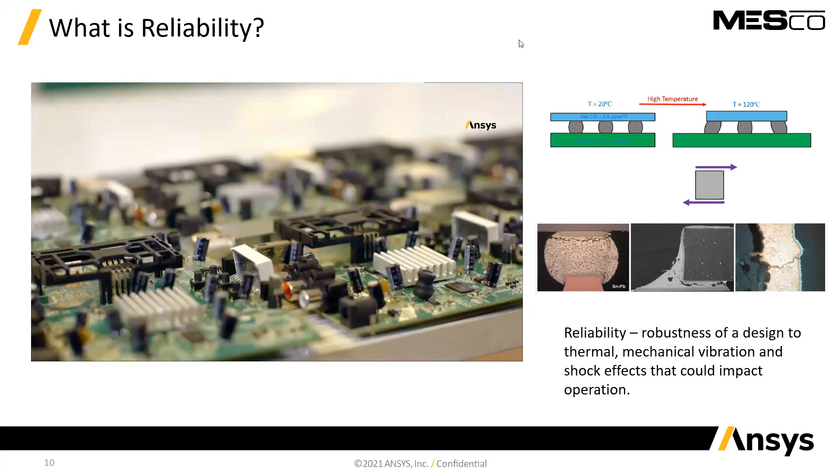Let me share my screen and get started with our two-hour introductory session about Sherlock. I want to run you through an entire project by loading the ECAD data, doing all the necessary definitions inside of Sherlock, running the analysis, checking the results, and then I guess at the end we'll have time to do some optimization loop here.

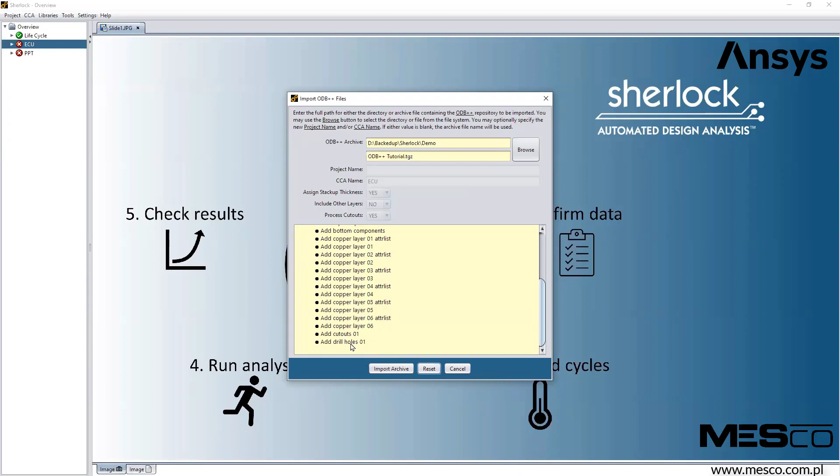Now we get a quick summary of what Sherlock is doing. As soon as I click Import Archive, we add board properties, a stack up, package, board outline, a couple layers, and then drill holes, cutouts, and everything. So let's click on Import Archive - that takes a couple of seconds.

You can see now on the left side, under our circuit card, we get automatically all the files from the ODB files added. There are some inputs automatically created: the parts list, stack up, layers, pick and place, drill holes, net list, and the DFMEA, which indicates that there's something wrong with it.

In Sherlock, you can see if things are fine, you get a green tick. If something's wrong, you get a red cross. But that's not an error message, it's more like a warning message - it just tells us that we don't have the right information for DFMEA, a failure mode analysis.

If we are not interested in any DFMEA analysis here, we can just ignore it. That does not mean something is wrong and all the results are wrong, it just means I didn't do the initial definition. So I need to go in and view my DFMEA data to fix this issue.

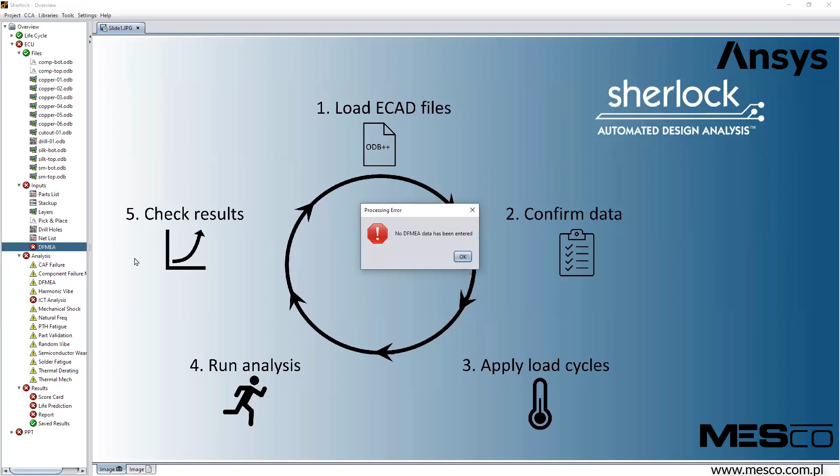So don't be worried when something is not marked with a green tick. Sometimes you get question marks - that also means there's a warning. You can check the warning and see if that will affect the results. Here it's just that no data has been entered. I can't run the DFMEA, but the rest is still fine.

Next thing I want to check when I load the ECAD files is I double click here on the layers. When I do this, I get the Sherlock layer viewer. That's a good way to check what kind of information came in - does it seem right? For example, here the blue line is the outline of the board. Does it look right? Is it the same outline?

Sometimes, if it's not such a rectangular board but a board with some round shapes, maybe there are less points in the ODB file and the outline does not look right. On the left hand side here you have the layers, and you can decide what kind of information should be displayed. So on the other layers we have the outline, and if I toggle it and untoggle it, you can see that the blue line is my outline. With the components, we can hide the components on the bottom here - now that's just a top view of the board.

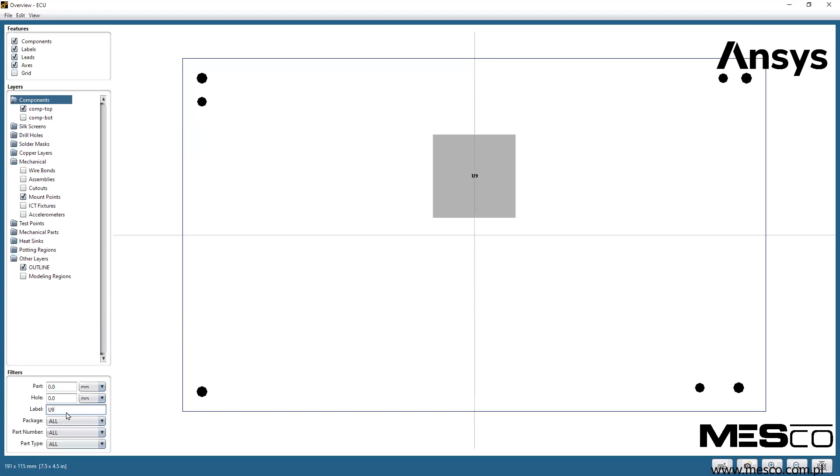On the bottom here we have some filters, and with the filters you can filter for parts by size, holes by size, by labels. If you're interested where's my component U9, just type it in, click enter, and now you see just component U9. If you write in U10, no, it doesn't work here, it just works in the other filter. What's important to remember: sometimes you don't see all the components and you don't know why. Just delete the label here and click enter again to get all the components back.

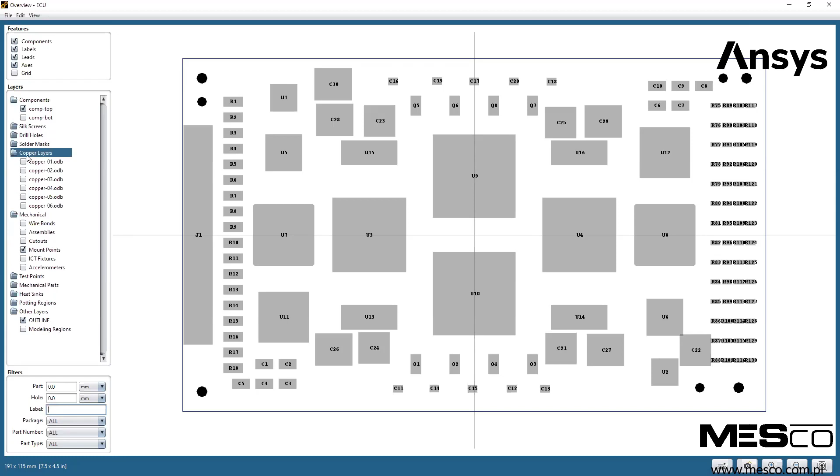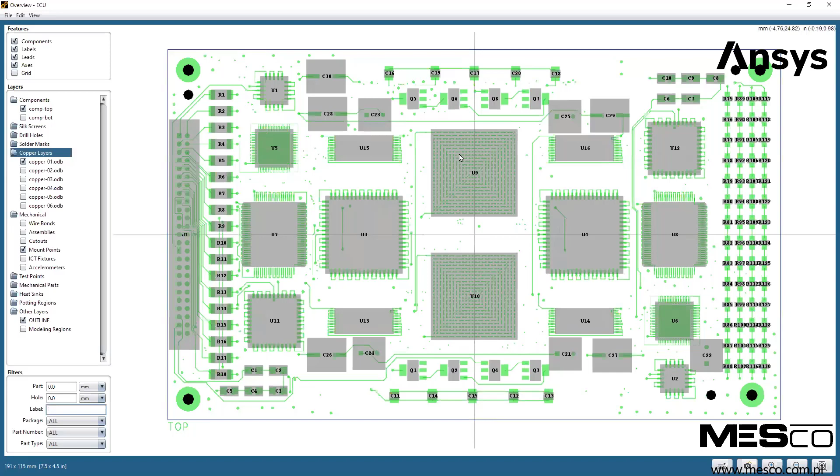I won't go through all the layers here, but the copper layer is an important one. You can bring in the first copper layer. Now we can see all of the components, and the green stuff is the copper. We can check if the copper here fits onto the pads, if the pads fit to the components here, and that's the first check. We come back to this a bit later. So the layer viewer is very important to check if everything seems right, which came in from the ODB++ file.

Next step, I usually open the stack up, and for the stack up we can see all the different layers of the board. Here in this case it's 11 layers. We have the thicknesses for each layer, and for the signal and power layers, Sherlock gets the copper amount for each layer. Here the first layer is 17.6%. That's what you have seen in the picture I showed you, all the green stuff, that makes 17.6% of the entire board.

And with this information we can predict material properties, like CTE, Young's modulus, and we get the same material properties for the entire board. You can see the combined values here at the top. Since there is no information on the laminate layers and the laminate material in the ODB file, Sherlock always assigns a generic FR4 material and predicts the material properties here. You have to manually check if you are using a different material and a different construction.

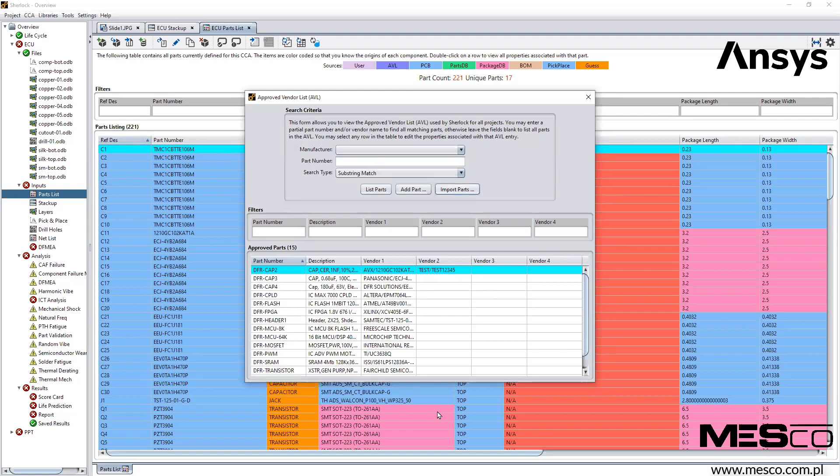And of course, you don't want to do this manually for all of the components. So the way to go here is simply export a CSV file from your PDM system, which has all the internal part numbers, description field, and then vendor name and vendor part number as separate columns. Go to import parts, select your CSV file, and import this information. That is very, very easy to import all the approved vendor list information.

Once this is done, you can select all of the components again here. Control A works here in the parts list to select all the components. And then you can update this parts list with the information from your AVL. This will give us the link between the internal part number and the external part numbers. Once we say update parts list, we're able to select all of the parts from the Sherlock part library.

One important thing here is the matching part number and manufacturer, or part number only. In this case, we didn't import any manufacturers with the ODB file, so we can't match part number and manufacturer. So normally we just select part number only, and then Sherlock will take the first component which is defined in the AVL list and matches this vendor here.

As I mentioned before, shouldn't be a problem for us, because we are assuming that for one internal part number, we get exactly the same part. It doesn't matter which vendor we order it from. If that's not the case, the part should have a different internal part number to identify it.

You can scroll through the list. Everything is green, meaning the information is from the parts database, and so we know we can trust this information. There is validated information from the data sheets in here now. And that is what we want to achieve.

In some cases, not all of the parts are found. That's not a problem. Whenever there's one part missing, you can go to edit parts by right-clicking on the component and manually add the information from the data sheet, check if everything is right, and then save the component.

So here in this case, you can see that's this capacitor. By right-clicking on the three dots on the right-hand side, we can see that the guessed value was now updated by the information from the parts database, and now it's green. So it is still a capacitor, so the guess was quite good. In this case, on the package, we have the package length, width, thickness, which is important. We have the material assigned here.

If I go to location, the location still comes from the ODB file here, which makes sense. The X and Y coordinate and the rotation and everything. That's information which is project specific, so I don't want to store this information in the library, but I still want to use the ODB information. We have the lead information. In this case, it's a C lead with a lead count of 2.

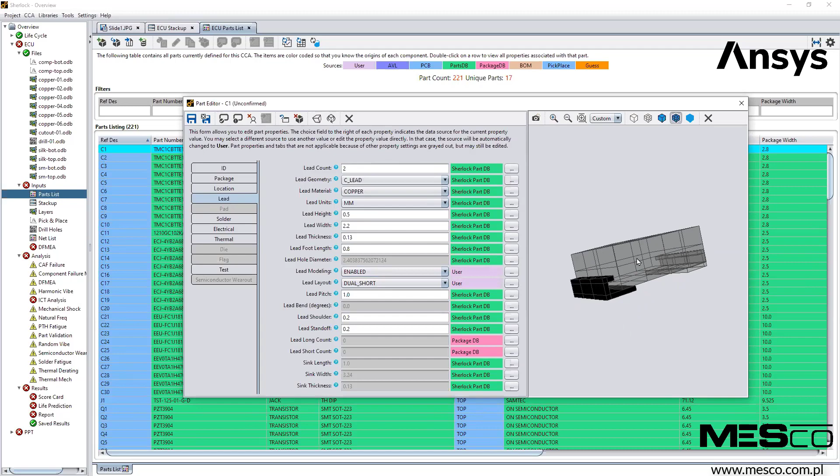Now, when I activate the lead modeling here and click on this cube at the top, I can bring in a 3D preview and check if everything makes sense, if the component looks like it should. And that's basically the level of detail I can get in here, and check if I want to model this part with this level of detail. That's how my FEA model looks.

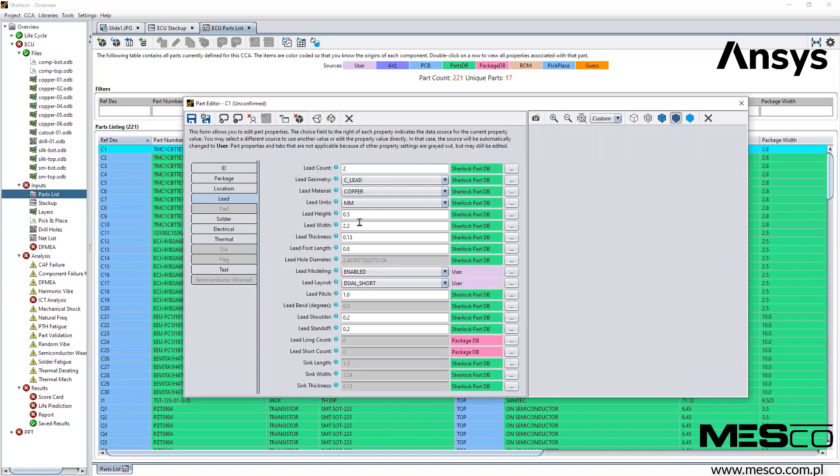You can apply changes here. As soon as you change something like lead modeling enable, you can see that this value is now changed to a user-defined input and not any longer from the Sherlock parts database. If you have done some changes, for example, for the lead geometry here, you can save what you have changed.

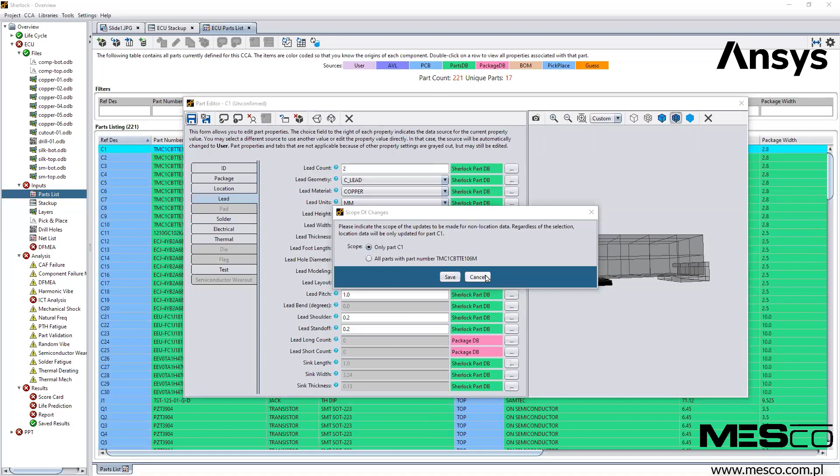When you do this, there is a message which pops up asking if you only want to change it for part C1, or if you want to change it for all the parts with the same part number. So you can see that here the part number is the same for the first 10 capacitors. So we can apply these changes for all the components. I cancel it here. Another thing we can do, we can confirm parts properties. As soon as I apply any changes, the part is unconfirmed. And unconfirmed parts can't be stored to local libraries.

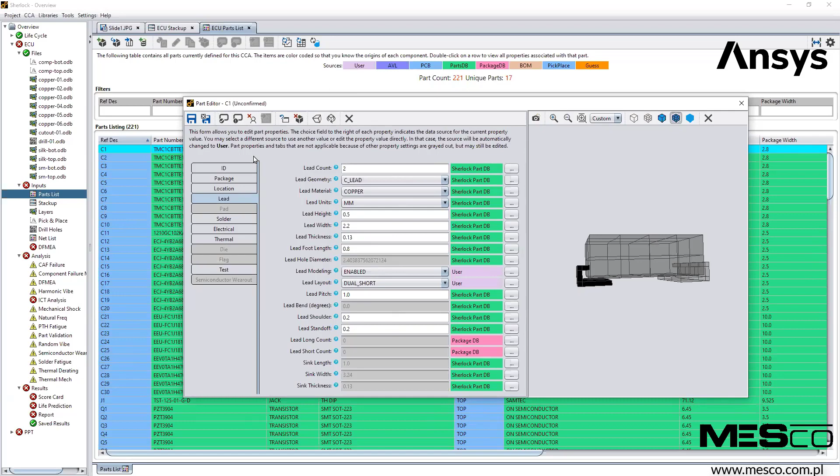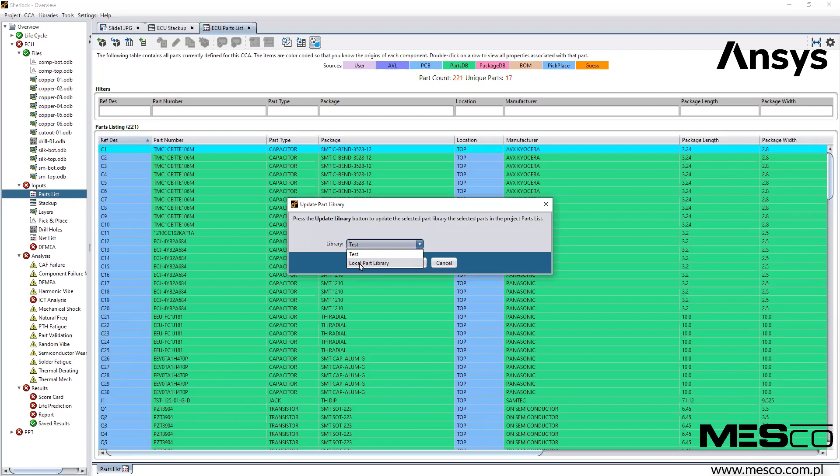So if we are sure now we have all the right settings in here, we can click on confirm all part properties, and in the next step, use the library update. To bring this updated information into one of our local libraries, click on this button here, select the library you want to update. The Sherlock part library is read-only. You can't bring in any new parts, but for the local part library, it's possible. Just update the library with the information from this part, and then you are able to use it with your next project. So that's, I think, a very important step to maintain your local library, bring in all the parts which are not in the Sherlock part library in the first place, and have them available for your next analysis.

Here, from my personal experience, it takes a few projects to get the components which are commonly used on your boards into your local library. So maybe when you first import the ODB file, check with the library, you can match maybe 80% of the components. So like 20 to 30 components might be missing. And then you create them manually, bring them to the local library. With the next project, maybe then just 10 components are missing, and that becomes better.

And at a certain point, just completely new components which have never been used before in your company are missing, and so you can then match them, bring them into the local library, and it's not too much work once you have set up everything here in Sherlock with the first few projects.

Okay, one last thing I want to show you now is once we updated the parts list, we need to check our layers again. So double click on layers here, bring in the layer viewer again. We might have changed some of the settings here. For example, U5 got a new shape here, and for some reason these components don't fit on the copper mask, and most likely that's a mismatch in the definition for the part.

So the part has a length and a width, and we define it in our electronic design tool, and we define it in Sherlock. And in Sherlock, the common definition is that the length is the longer side, and the width is the shorter side. And the rotation angle is defined by the length to the x-axis of the board.

If it happened that in the ECAD tool the length is the shorter side, the component is rotated by 90 degrees, like here. And that's something we want to check once we have all of our components in. We check here at the top layer if everything fits on the copper. So components at the top, first copper layer, identify two components are wrong.

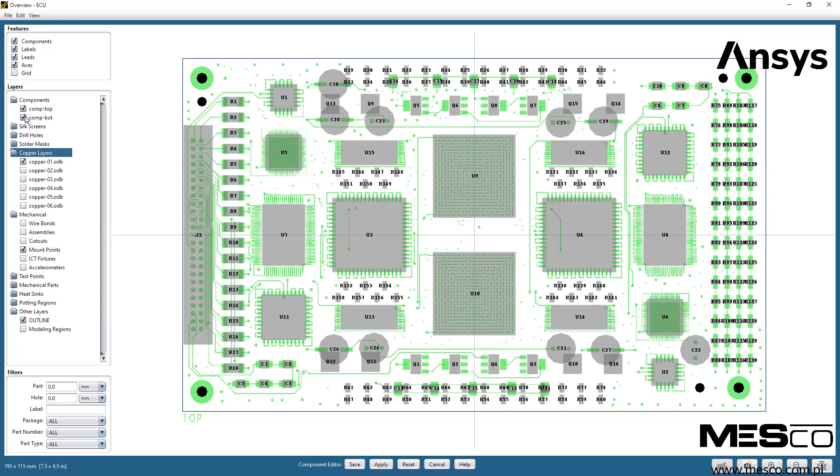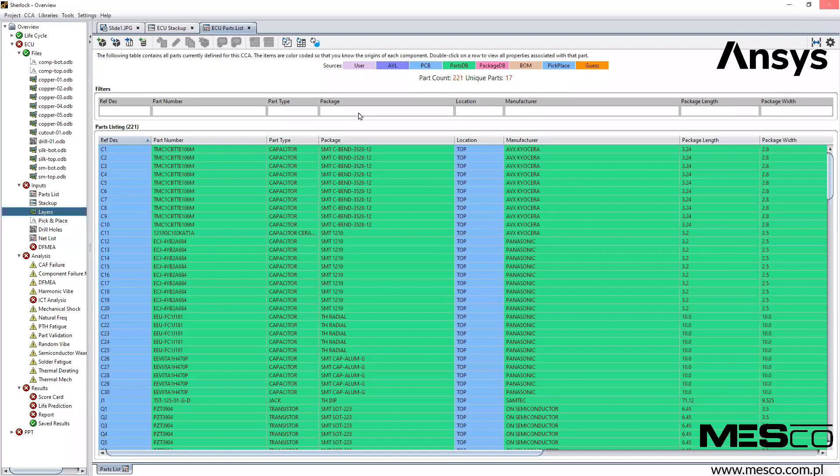Then we can do the same for the bottom side, components on the bottom, last copper layer, check if everything fits, and at the end, save your changes. And now we are fine. So second step, confirming data, is done. We have all the information in, we have the geometries, so we don't have to worry about this.

At this point, I want to show you more information. So as I mentioned, in the help you can find, for example, under managing parts, how does the part library work? How does the approved vendor list work? And part list management, filtering components is very powerful. That's all information which is available for you in the help section.

But if you want to learn more about Sherlock, I would recommend logging into the ANSYS Learning Hub, because there are tons of information about the different disciplines, the different products we have at ANSYS, different workflows, and there's a very, very interesting section about electronics reliability as well. Here, if you go to the structures section, under structures, that's basically all the Workbench, Mechanical, optimization information. And there's a special section about electronics reliability.

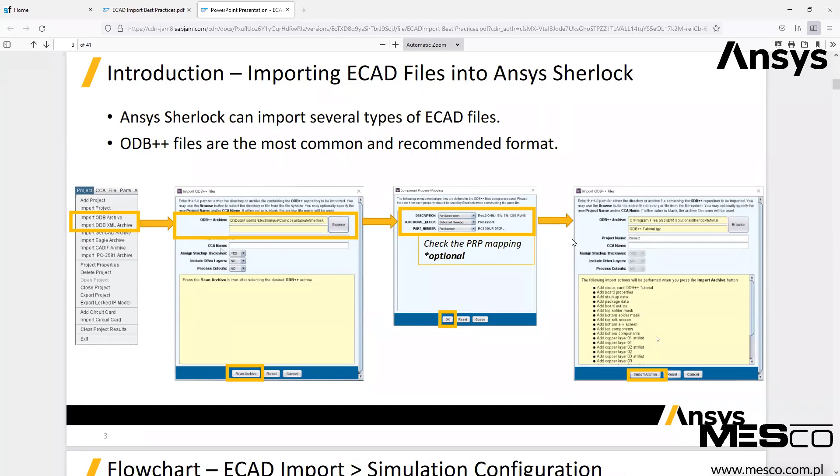Most likely you start with the Sherlock basic training. If I click on this, there are different sections here. Basically all I'm showing you today. And what I would also recommend is here in the quick start page, there's an ECAD import best practices. Let me open this in a PDF viewer. Basically, the entire import process of the ECAD file, everything I showed you today so far, is in this document, which makes it very easy to handle.

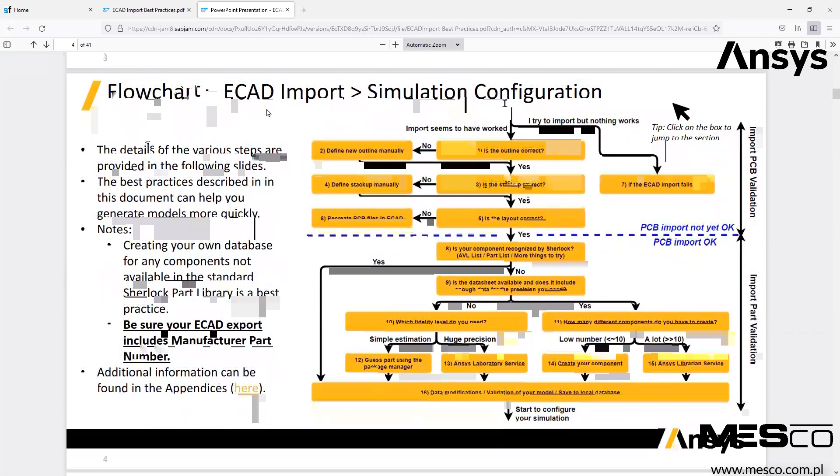There's this flow chart: once you imported your ECAD file, it worked, everything came in right. The first question, is the outline correct? What does this mean? Just click on this yellow field, and now you get more information about how to check the outline, what you have to press. Here's a measurement tool. You can

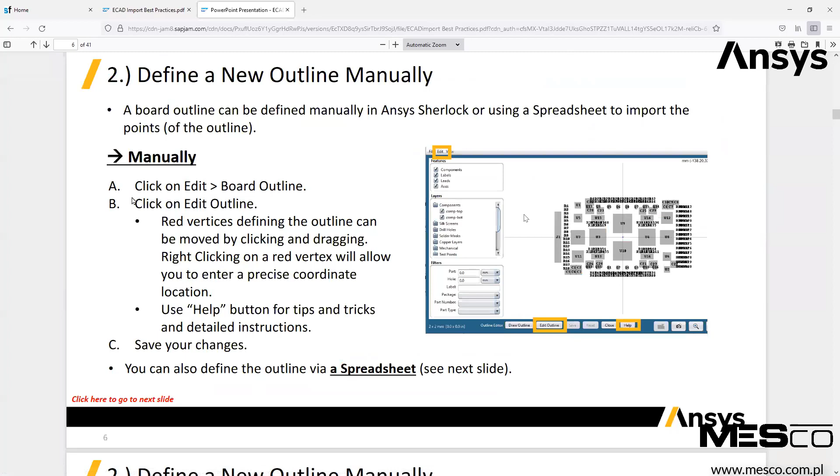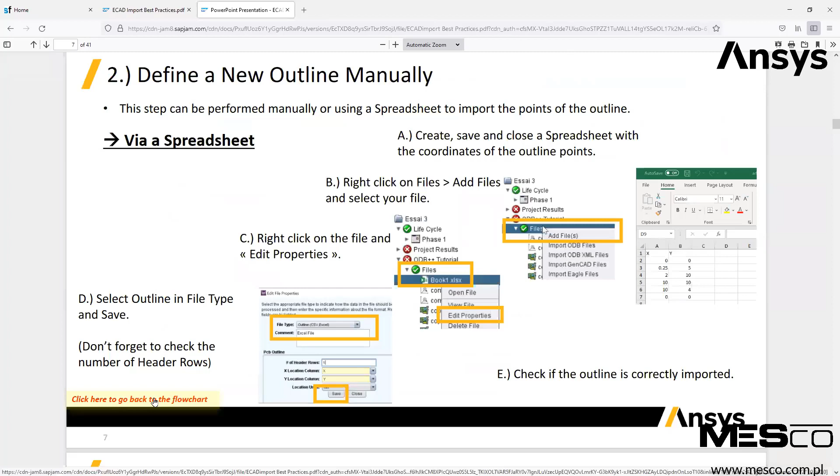and all the information is in place for the start. Very powerful. And I think the ANSYS Learning Hub in general is a great source of training and information for all the ANSYS products. So please reach out to your colleagues at MESCO for more information on the Learning Hub if you don't have access to it today.

Okay. So just checking the Q&A section, no questions right now. I think we can move on to the next step. Step 3, apply load cycles. Here at the top, we have the life cycle definition.

And basically we have to tell Sherlock how this board is used in reality, or what our test cycles look like. So for example, you want to confirm a test scenario.

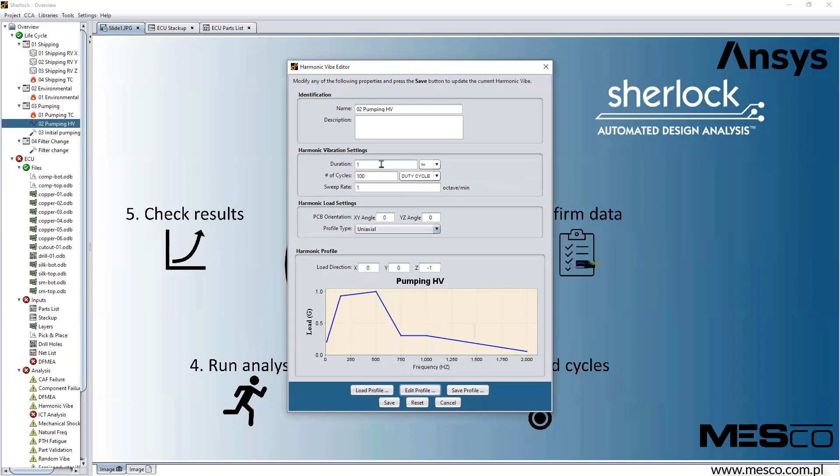Again, here our duration is 1 hour, and it's running 100% of our pumping phase. So 1 hour, that is exactly the same time that the pump is running. That makes sense. And so it is repeated 3 times by our pumping phase here.

For the filter change, that's a bit different. So edit properties. Filter change just takes 5 minutes, and I have to change the filter once per day. Again, once per day over 4 years. And the filter change itself here, our profile is this half sine curve. We measured with some acceleration probes, and this shock just takes 10 milliseconds, and it's just repeated once every day.

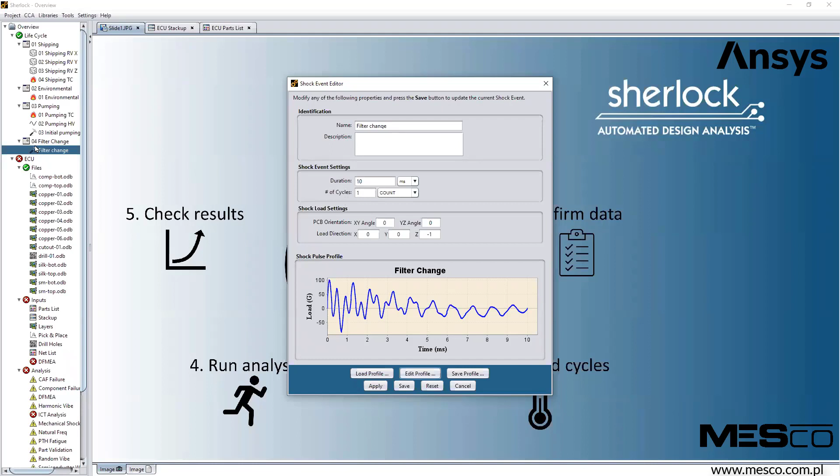For the first time, the life cycle definition might be a bit confusing because there's not just one solution how you should define a life cycle. There are always more than one cycle possibilities. If you say that the cycle runs 24 hours or once per day, is basically not much of a difference here. What I would recommend is, after you did your definition, go to the view life cycle option. So right click on life cycle, view life cycle, because here you have some graphical input, and you can easily double check if it makes sense what you defined.

So like here, 4 years of service, that's 100% of our service life. And as you remember, we defined shipping is just the first 3 days. So shipping phase plays only a minor role here in the entire process. Whereas for the environmental phase, we defined it's every day, 24 hours. So that's 100% of our entire service life. Pumping was 3 hours per day. It's more than shipping throughout the entire service life, but not as much as the environmental. And filter change, that was also just 5 minutes per day. So that makes sense.

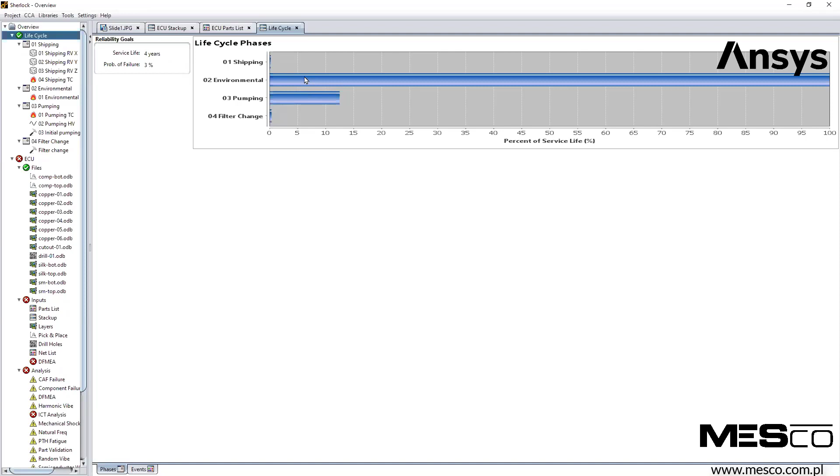And you can do the same for your events to check if the thermal cycles have the right impact of the entire service life. So the environmental one was 24 hours every day, and so 100% of the entire service life. And the others are smaller. Here's the harmonic vibe event, and random vibe event is just a very, very small impact seen on the duration throughout the entire service life. So that is what I would recommend.

Define your life cycle, check this in the life cycle viewer if it makes sense. Make changes to the settings if you are unsure, and compare it. Does it make a difference, and is the life cycle definition reflecting the right time throughout your entire service life.

Once you set up everything for the life cycle, right click on life cycle, save life cycle, then you can use it with every future project. So like I did it at the beginning, load life cycle here.

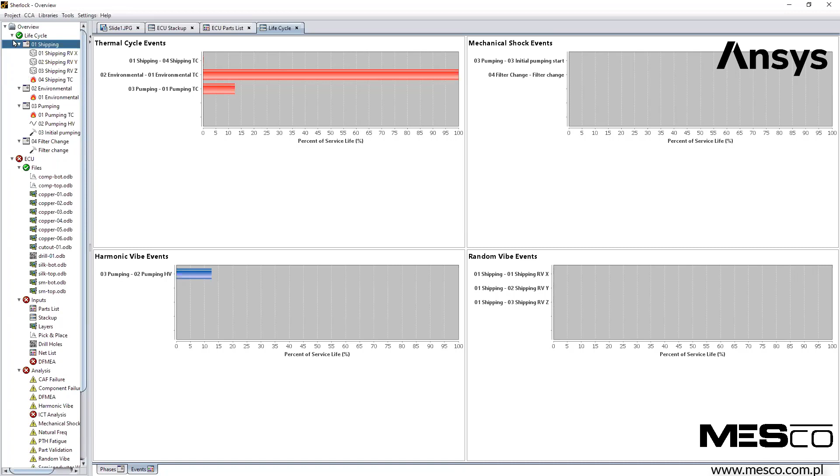Okay, yeah, that was our third step: apply load cycles. I think, again here, it is important just to play around with the settings a bit to understand how best to set up the life cycle. There's always not just one solution. There are more ways to define it, and you need to feel comfortable with the results with the life cycle viewer. Again, here there's a lot of information available in the help section.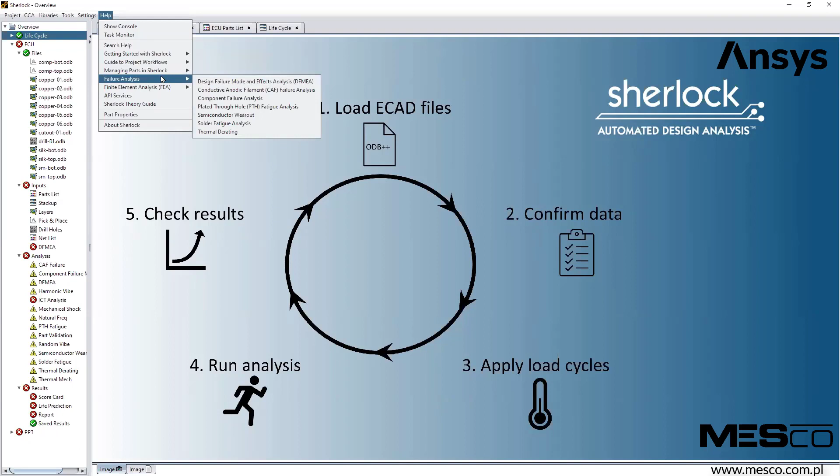Let me check here. Here's the life cycle management. Under this help site, you find all the information necessary to define your life cycles.

Okay, but now basically we are ready to solve our analysis. We have all the ECAD files, we have the information on the materials and the leads. We have our load cases defined. So that's all it takes to run the analysis. And when I go to the analysis section here in my Sherlock tree, you can see all the different analysis types which are available.

So CAF failure analysis, that's basically a check on the design of the board. If there are any drill holes very close together, there might be some shortages in between the drill holes. When you drill it, then you get micro cracks in the board, and this will lead to some electromigration and some copper bridges between the drill holes if they are too close together and carrying high voltages. So that's a design check here.

So let us go back to the layer viewer once more. Bring it in here. Let me show all of the components. And here in the layer viewer, you have under the mechanical folder the mount points. You can again untoggle it to see where are the mount points. The mount points are the black dots, and there is an automatic mount point recognition out of the drill file.

If we have drill holes with a higher diameter, I don't know exactly what's the threshold, but for drill holes like these here, Sherlock will automatically add a mount point, in this case a mount hole with the diameter of the drill.

When we click on edit, select mount points here, we can easily edit these mount points. So for example, right click here somewhere in the middle, add mount point will give us this window here. We can name the mount point. We can select what type of mount point it is. Mount hole is basically, as you can see here, just a hole with a diameter, and the red nodes are constrained. We fix the nodes here on the diameter of the hole.

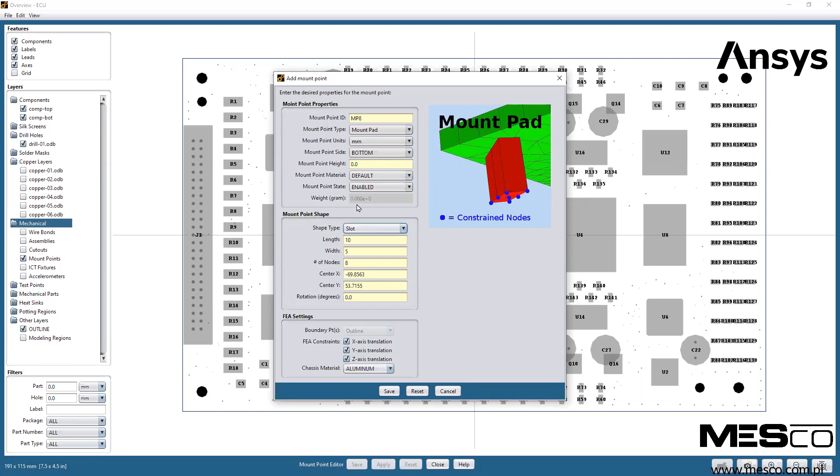All the mount point size, the height of the pad, and everything can be changed here, and the shape, if it is rectangular, if it is a slot, if it is circular, or if the entire PCB is fixed, then we can use PCB here as well. Standoff, here we just constrain one point in X, Y, and Z direction, so it can rotate around this point. And the last option is a support pin, where we basically just constrain one node on our PCB board. These are the different options.

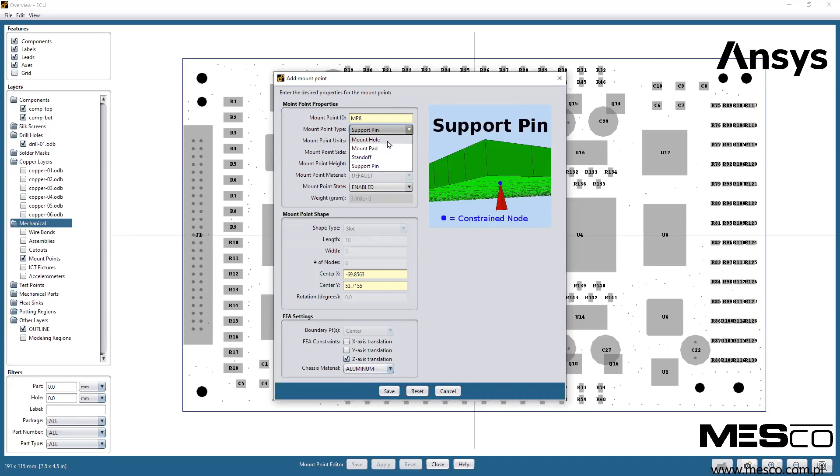Let me select the mount hole, and let it stay with slot. Of course, I can type in the exact numbers here, but what I often do is I click on save. Here you can see my slot, right clicking on it. I can go back to edit, can rotate, but what's also possible is if I select it and move it like I want to in size, here in shape, you can get the exact geometry. And let me delete the mount point, I don't need it here.

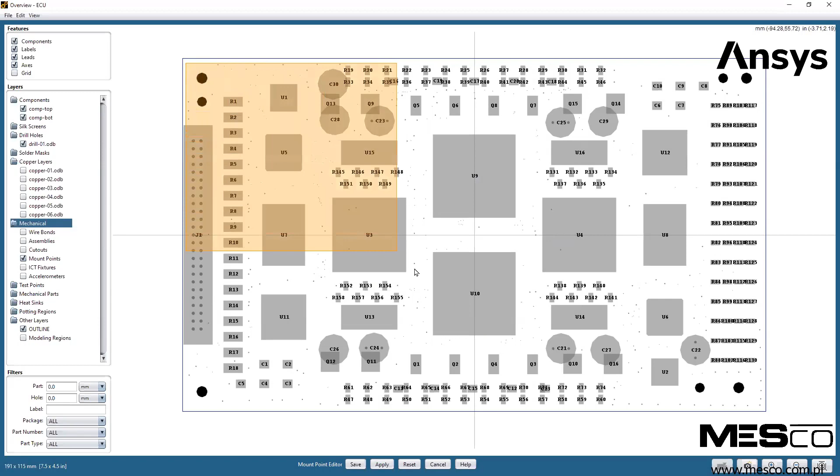Then we can multi-select if you press the shift button. So if I press shift, left mouse click, I can select all of the mount points, and by clicking Control and left click on one of the mount points, I can select multiple of the mount points, edit the properties, or simply delete these ones as well to get just the mount points in the corners. Click Save, and now our constraints are ready.

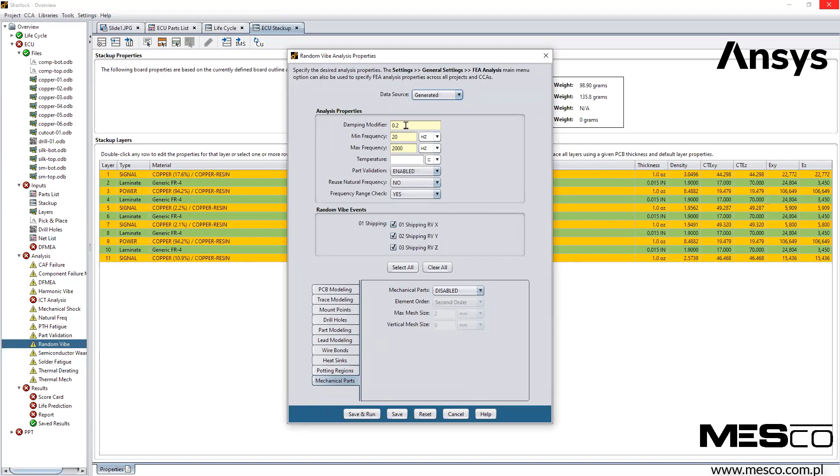Next thing to do is go to the random vibe again, right click on it, edit properties, and that gives us this window here. We can set our analysis properties. So what's the minimum and the maximum frequency, our damping modifier. 0.2 is the damping we recommend for PCB boards. Of course, if you have done measurements and you have more information about the damping, you can adjust this value to the calculated damping in your case.

If the test runs not at room temperature, but at some different temperature, you can insert the temperature here, and this is reflected in the material properties.

Reuse natural frequency. If you already have natural frequency results here, you can reuse this to save some time. Frequency range check will let you know if your input PSD curve uses a different frequency range here.

Next we select one or more of our random vibe profiles we defined here. Let me just check, I just want to use the Z direction for now to see how Z is affecting the reliability. But if you select more than one, you get combined results. And in the next step, we need to define how our model should look like and how we mesh the PCB.

So for PCB modeling, we have different options here. Uniform means we just export one solid body for all of our 11 layers. If we use layered, one body for each layer is created, so we get 11 layers for the PCB with the right materials according to the layer materials here.

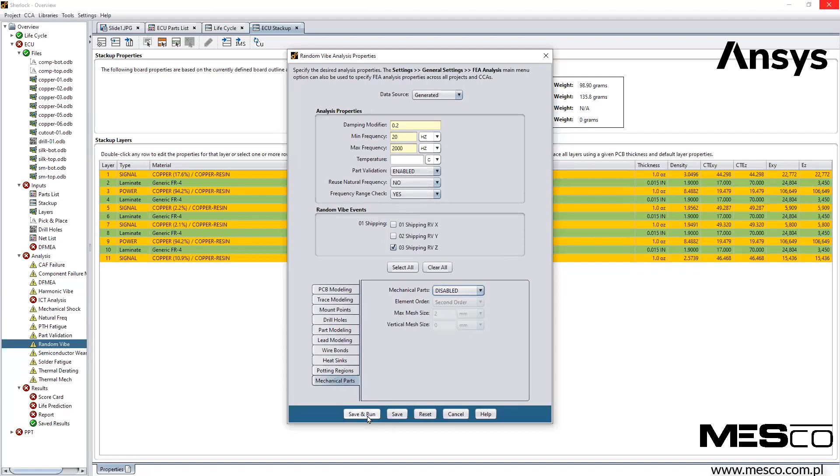As soon as I click save and run, Sherlock creates in the background the input files for our ANSYS solver, runs the random vibe analysis, reads back in the RST file, and does the lifecycle prediction. Here in the task monitor, we can see all the tasks, and here the running task is right now the natural frequency analysis.

Now it's running the random vibe in Z direction, so there's still something going on.

When I right click on random vibe and select show location, then I get my Windows Explorer, and you can see all the files for the random vibe analysis. Here are the APDL, the CDB files. There is the RST file from the natural frequencies already, and errors, outputs.

So basically all the information you might be interested in if you're a mechanical engineer. You can even open the model in mechanical, read in the results to do the post-processing in mechanical if you want to. In general that's not really required - we can do everything automatically here inside of Sherlock.

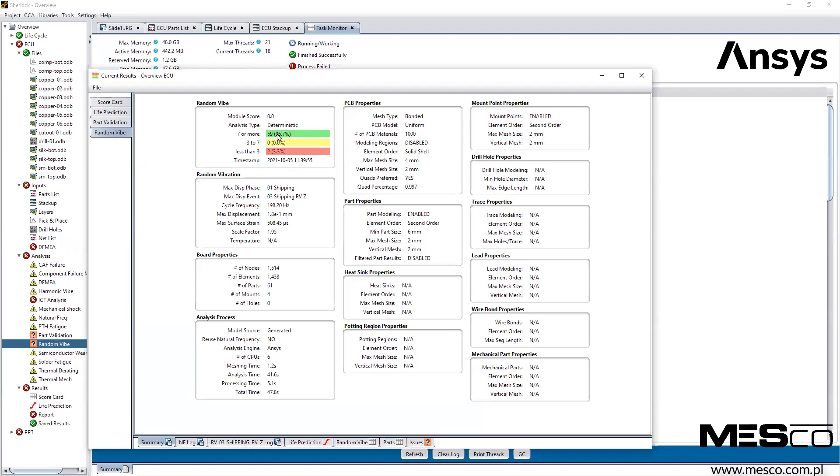Once we have results, we can see now there's a question mark. Double click on random vibe, or right click, show, view results will give us our results for the random vibe analysis. It starts with a summary, which indicates that just 2 components are failing, the others are fine. Remember, we filtered some parts out, so we didn't use all 221 components in this analysis.

We have a log file, the output file for the natural frequencies. We have the log file for random vibe, just in case there are any errors or warnings we are interested in. By Control F we can even search in these output files.

Next thing is our life prediction curve here. It shows our 4 years of service and our 3% failure probability. The red curve is the failure prediction, and we can see that after 1.5 years we have a higher probability of failure than 3% already.

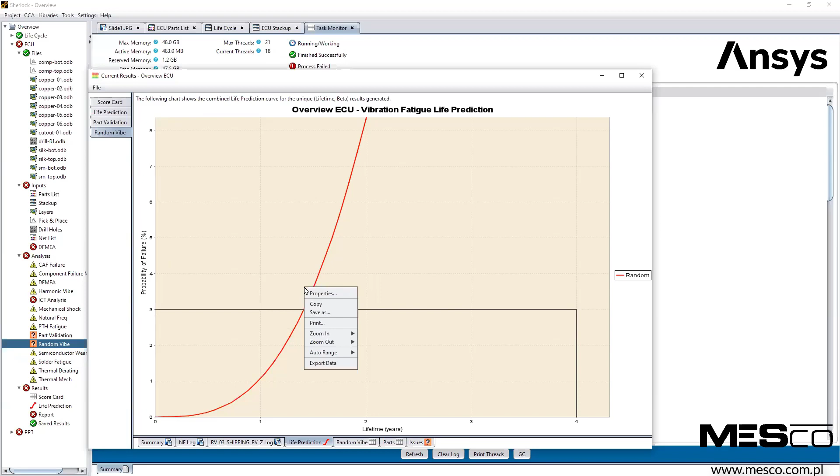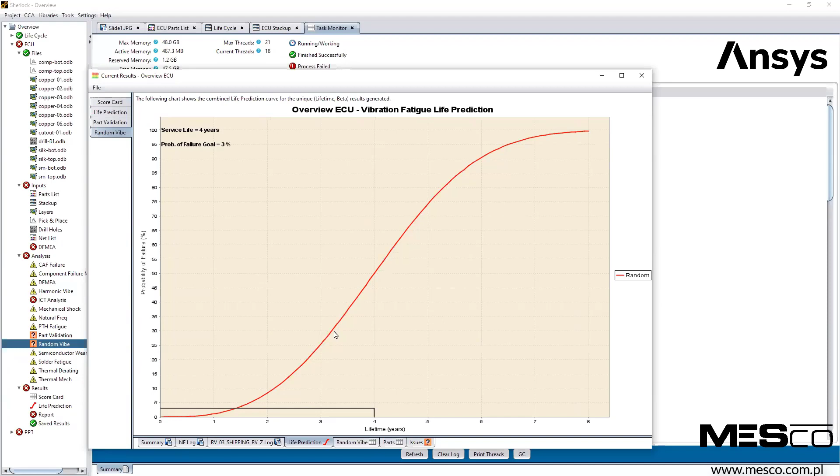By simply left clicking into this window with the mouse and drawing this bounding box, we can zoom in and see a bit more what's happening in this area. By right clicking, zoom out both axes, or auto range will give us back our previous view.

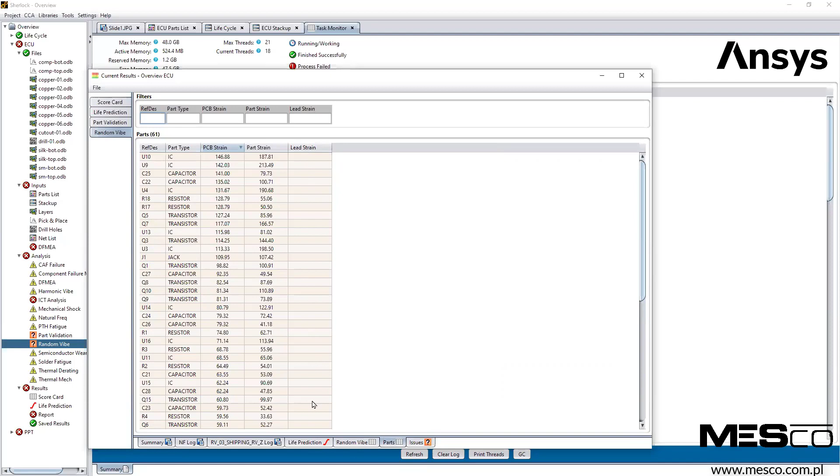Very interesting is this table view. Now we can see all of our components. We see that U9 and U10 are failing. We can get more information if we enable leads on the lead strains here. And the last tab is the question mark tab - what are our issues?

The random vibe PSD curve is defined starting with 10 Hertz, and we ran the analysis starting with 20 Hertz, so there's a mismatch in the PSD curve to our analysis. The second warning is that the part validation was not successful - in my case it's because it's checking for the AVL list information, and I don't have AVL list information here, so it's failing. I can ignore it as well.

Important to remember, we now know exactly where our components which are critical are - U9 and U10. Let's go back once more to the layer viewer here.

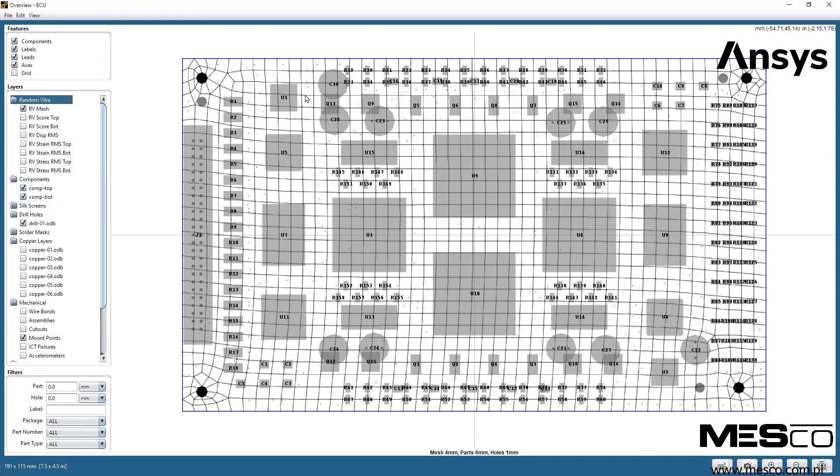Now we have a new folder, random vibe, which gives us information on the mesh we used - a very coarse mesh for the board. We get the score at the top for our components, so now it's easy to see that U9 and U10, the two BGAs, are the components which are failing. No issues on the bottom. Smaller parts like the resistors are ignored.

We get the displacement of our board, and we can see that we have high displacement here in the area of the two BGAs. Maybe we need some additional mount conditions here to prevent the board from bending too much.

We can get the strain results here for the bottom as well, and stress results. If you move with your mouse into the picture, you will see here in this area the stress value indicated. If you're interested in learning what's the value, how high the stress is, just check it here at the top.

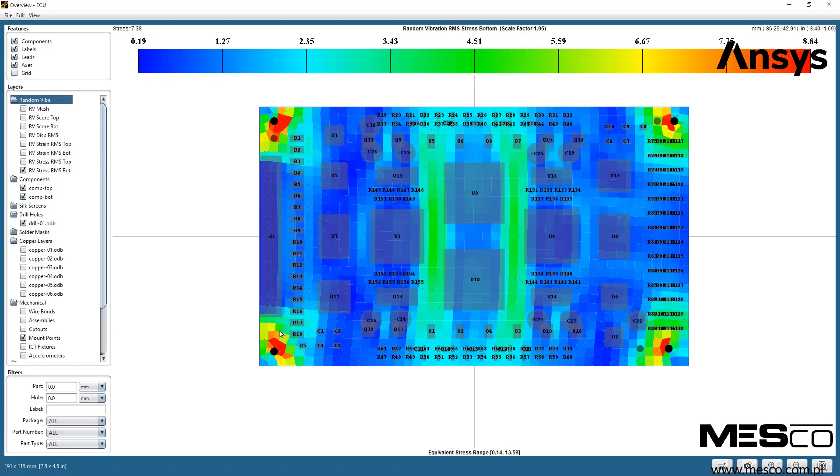That's random vibe. Solder fatigue, that's the second analysis I want to show you today. Right-click, edit properties - it's a lot easier to use. We just select the solder material here, and we select maybe all of our thermal cycles, and that's all we have to do for solder fatigue.

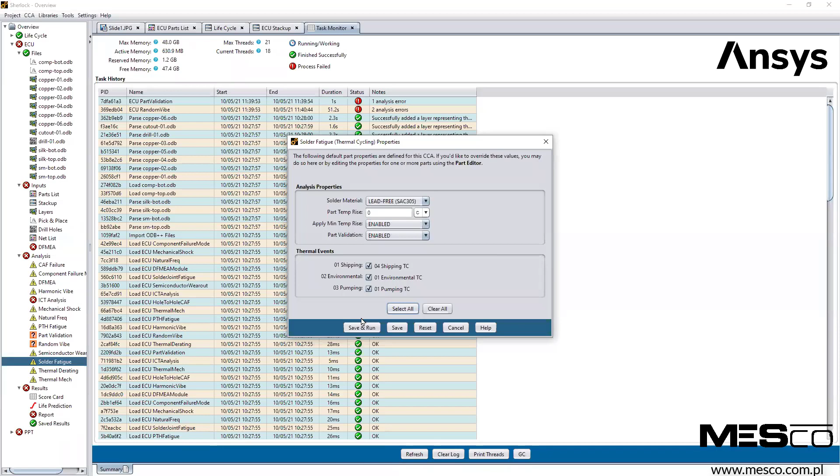Because of thermal cycling, we don't create a 3D model and run an FEA analysis. We just predict the strain energy in each solder joint analytically. We have formulations which use all the information from the parts list. When I now click save and run, normally that's very fast.

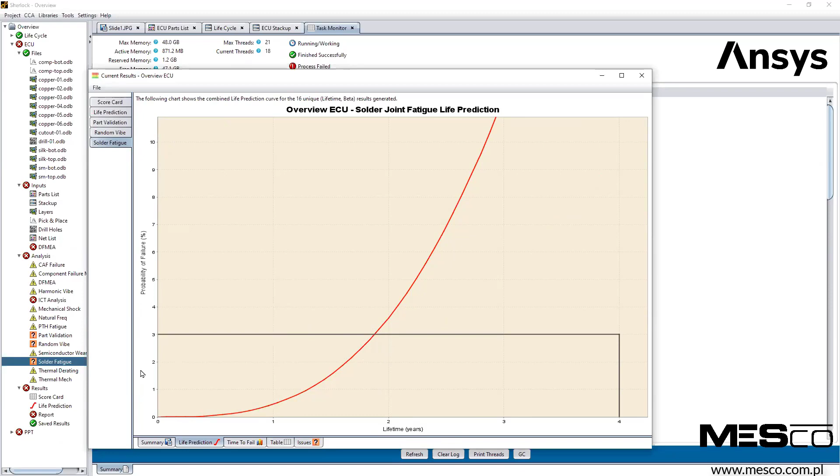So we are getting our results here - additional life prediction curve for solder joint fatigue. After 1.8 years, we see a higher probability of failure of 3%.

Again, go to the table view - we can easily identify the components which are critical. In this case, again, U9 and U10, and the resistors here. Some others are close to being critical.

So the time to failure is here, some criteria we can use. Time to failure is 17 years compared to 4 years of expected service life.

Right click on one of the components, do a life prediction, we can find this curve. We can see it's still fine, but maybe close to getting out of reach to create a higher probability of failure here.

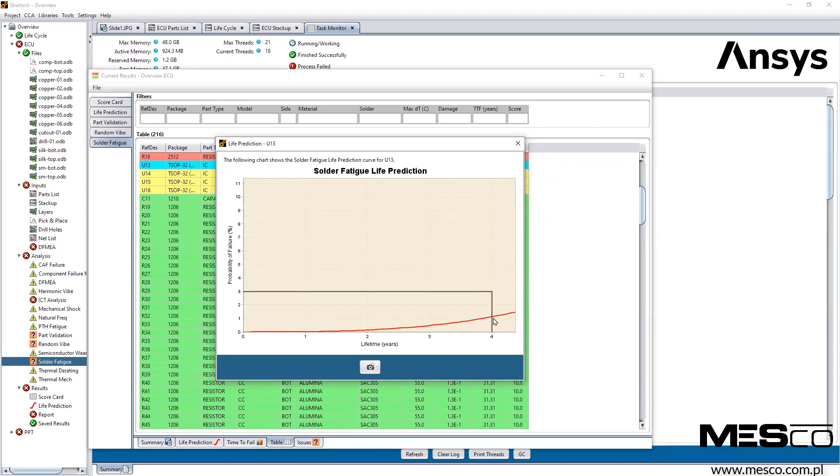So it's 1%, more than 1% - that's very close, but still okay, that's why it's yellow. The green ones shouldn't cause any trouble regarding reliability.

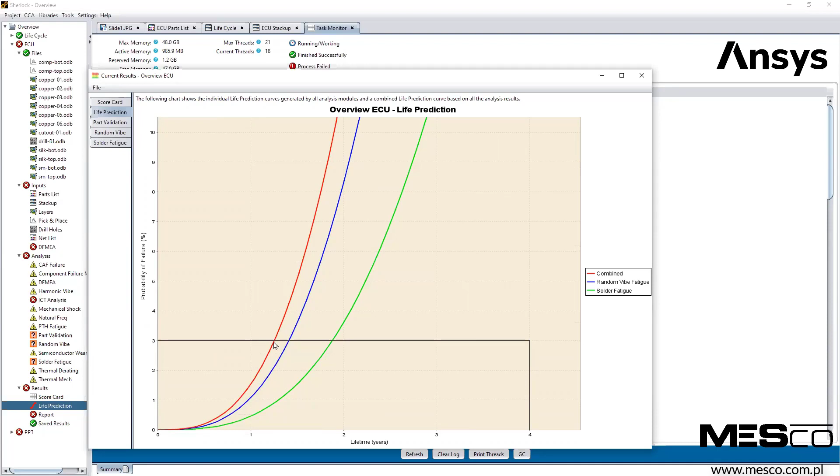We can only take... we definitely have to do something to improve our board.

But in general, now we have seen all the 5 steps. We have our results, and now we can go back to refine our setup. One thing I want to show, I think we have 10 minutes left here.

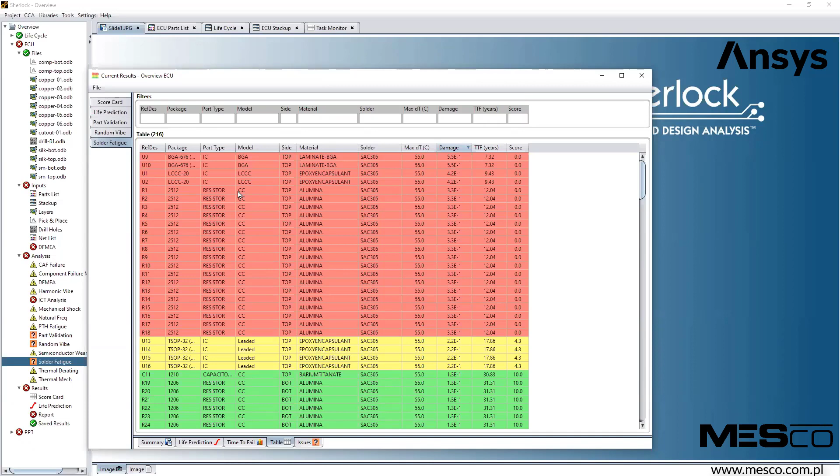For the solder fatigue, the resistors here, these CC resistors, these chip components, are failing. When I go to the parts list, I want to search for R1, just type it in here in the filters. Go to the top, that's the first one, R1.

Edit parts. These CC resistors are soldered to pads, and the pad size is very important in regards of the solder shape. If I use a bigger pad, I will have a higher reliability of these components. If you click on this button, it's even possible not just to use the recommendations from the datasheet, but read out the information from the top copper layer.

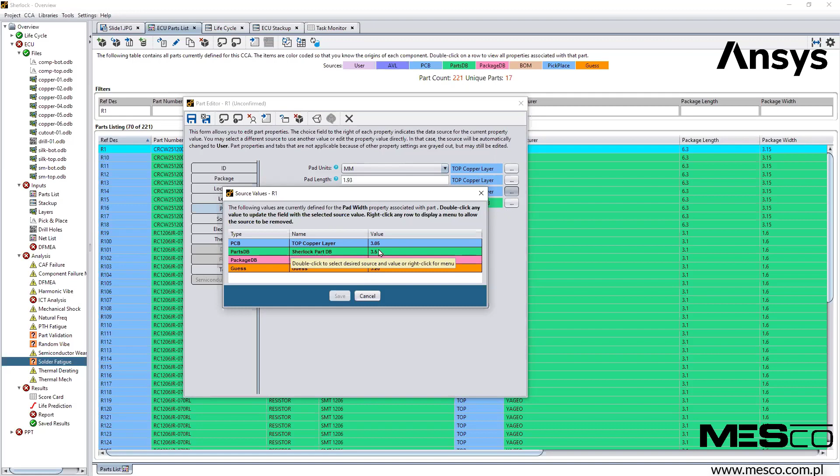So now we get the information our ECAD designer used here, and we increased the value here a bit. Let's see, the width of the component of the pad is a bit smaller, so maybe I want to change back to the old value. So double click on the line from the parts database, and I restored my previous setting here. Click Save for all of the components.

Then get rid of the filter again. If I scroll down to the resistors, we now have updated parts properties. Simply have to run the analysis again.

If you want to compare the results, I simply save results here, my existing results. Of course, give it a good name. Here I just used the timestamp to compare them. Now you run the solder fatigue analysis again, run analysis task, use the same settings, and wait a few seconds till we have the updated results.

And if we double click, we can see that the change in the pad properties didn't increase the lifetime a lot. Oh, it did for R1. Here, I didn't change it for all the other resistors. It seems for R1 I increased it by 2, 2.5 years, the lifetime. So using these pad properties didn't solve all of my problems.

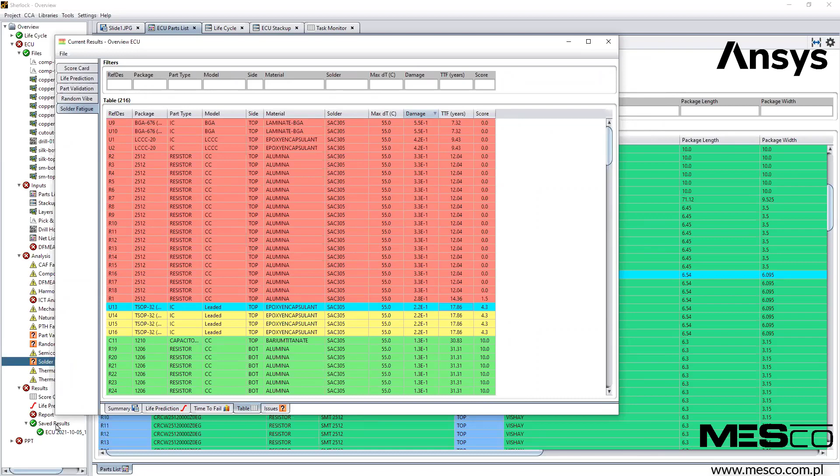What I can do is now compare it against my previous results. And if you want to archive just the results, not the entire Sherlock project, I would recommend using these saved results, because you can open them in a Sherlock viewer. This Sherlock viewer doesn't require a Sherlock license, so you can install it on any computer and open the results.

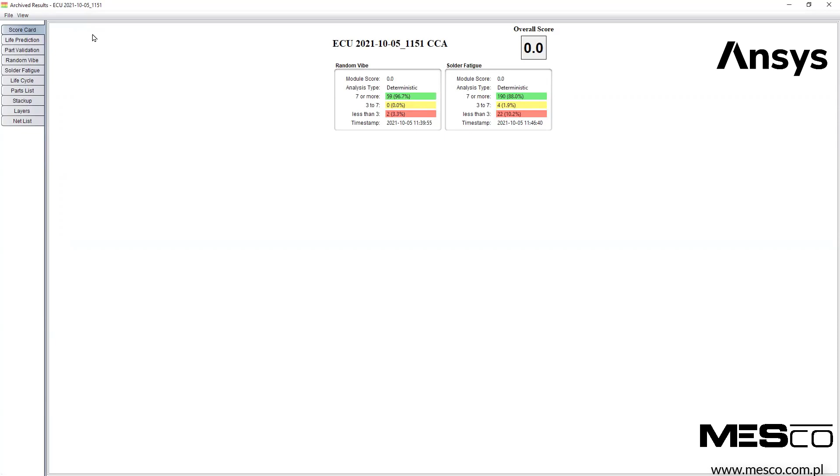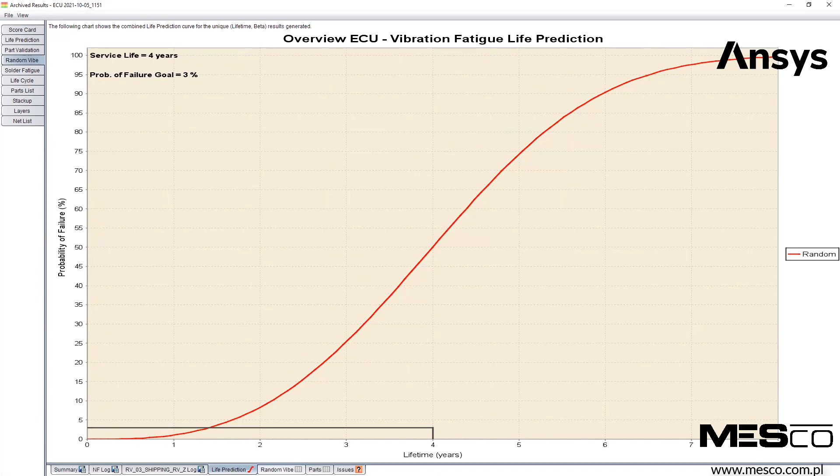And here's basically everything you need to know about the project: the summary, life prediction curves. If you want to learn more about the random vibe, there is our random vibe curve. We have the results, we see the critical components. The same for the random vibe.

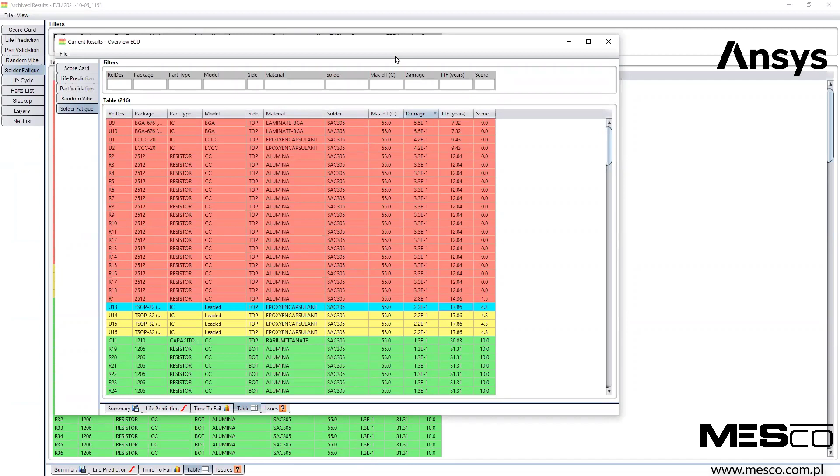And here we can compare the results from Sherlock against the previous results. But there's more information on the life cycles, on the parts list. You can go in and view parts properties. Here you can check the stack up, you can check on the layers. So now we don't only have random vibe, we can identify the critical resistors here from the solder fatigue analysis.

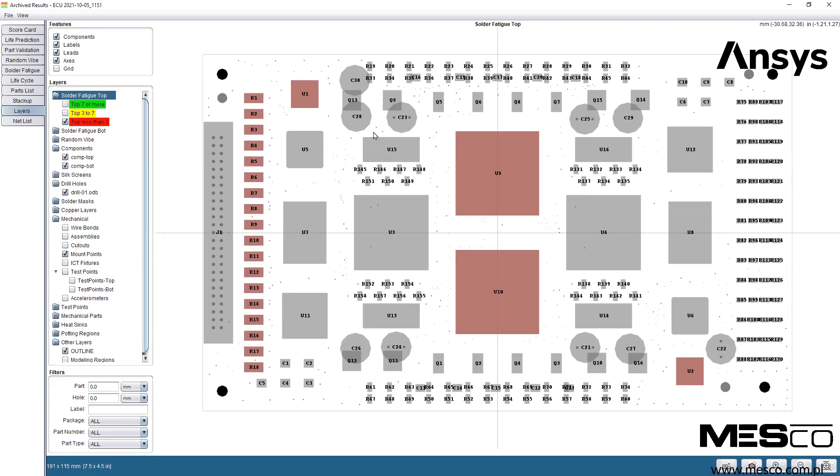Basically all the information is here in one file, easy to share with colleagues, to check the results, decide on some improvements, some changes in the setup, to run the analysis again and check if you get better reliability with the new design iteration.

Okay, I think I showed you all the necessary steps to get your ECAD files, use the Sherlock part library or the local library to update the part information with more properties, apply the load cycle and do the load cycle definition, run the analysis, and then finally check the results, do some modifications, update everything, and compare the results again.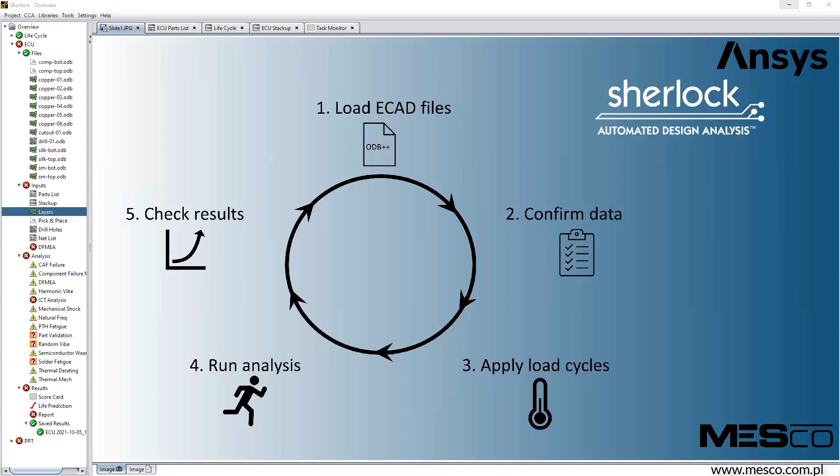Okay, maybe from my side, one question - in one of your presentations, you showed that you can put an additional mounting point, and that should also change the results. Can you show how to put an additional mount point if we don't have any questions right now? Sure, yeah, sure, because that could be interesting.

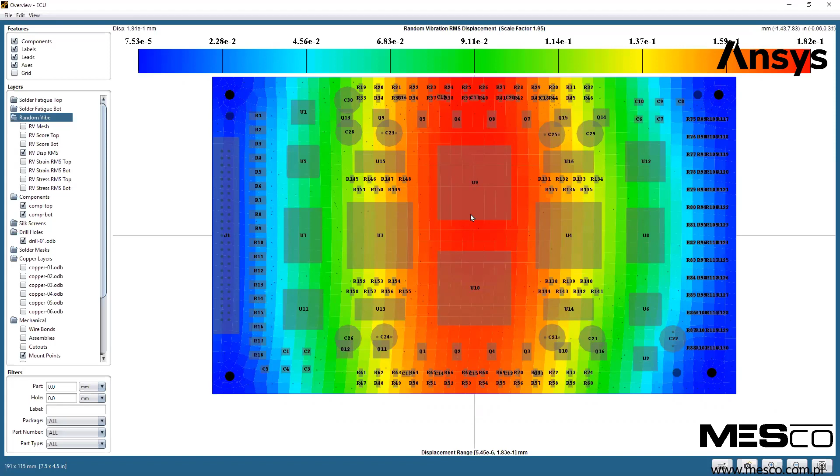Sure. So here in our results, we see that just mounting the board in the outer corners will lead to a high deflection here in the center. One way to reduce it is maybe place a mount point here in the center. It is quite dangerous because the closer the mount points are to the parts, that might affect the strains at the parts as well. But we can try it here.

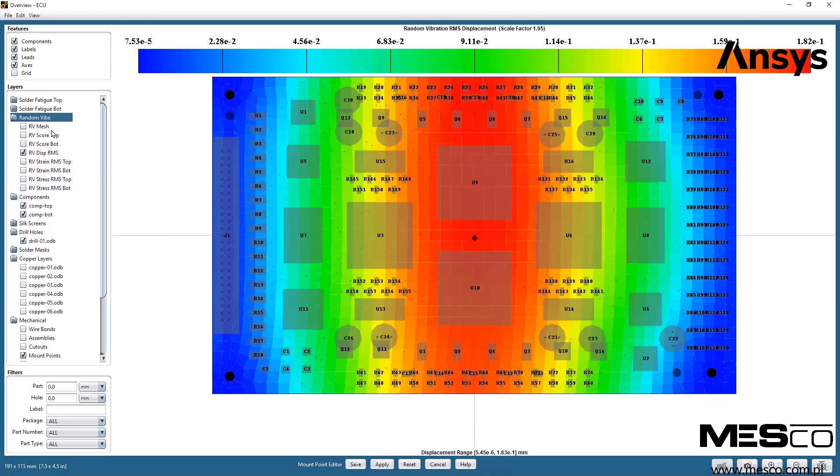Click on edit, edit mount points. We can, for example, copy one mount point which is existing or create a completely new mount point. I just want to copy this one here, copy mount point, then I place it here. Okay, for now, maybe it's better to get rid of the red zone here.

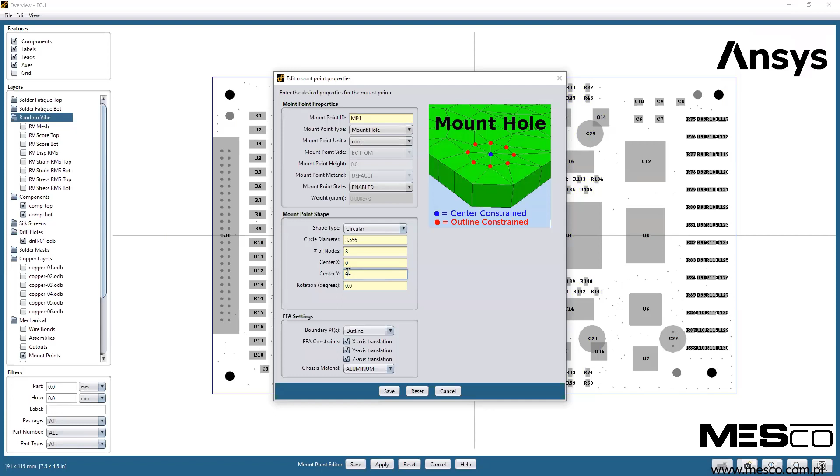If I click on edit properties, I can go in and make changes to my setup. For example, I want to have it exactly in the center. So I go for X and Y 0. Save and save this mount point here. And let's go back to the random vibe analysis. Say run analysis task, use the same settings, save and run, and wait till the analysis is done.

In the meantime, we've got 2 questions on the Q&A. Okay, yeah. The first question is: calculate MTBF here inside of Sherlock? That's not possible. It was possible a couple of versions ago, but we decided that MTBF is not the way we want to go with Sherlock, because MTBF uses handbook predictions, and with MTBF we don't take into account the real physics behind it. It is very interesting to use MTBF, and I guess some customers request MTBF figures, and

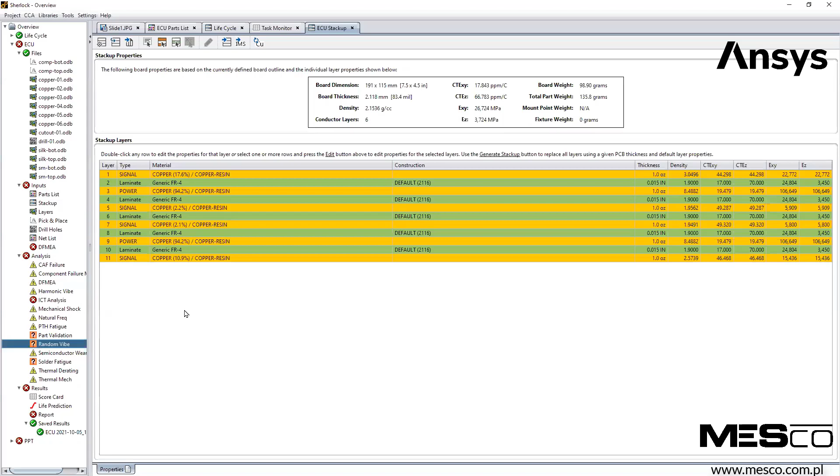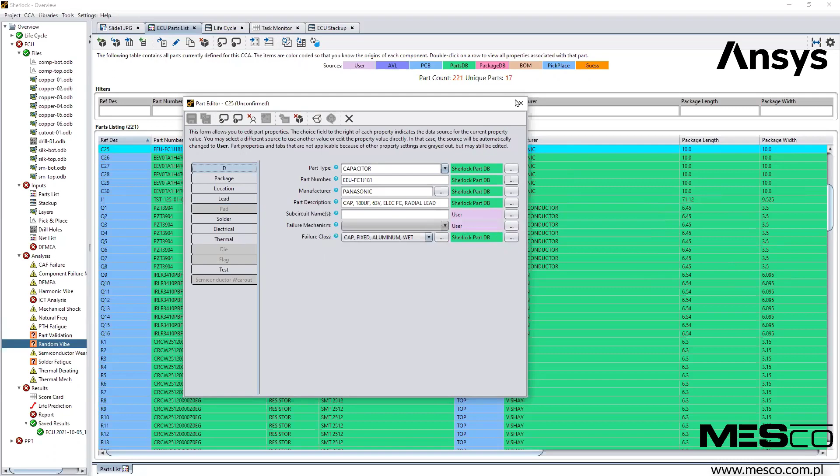we can get the MTBF calculations in ANSYS Medini, a different tool. There is a link between Sherlock and Medini, so we can basically hand over our parts list here. In the parts list, we have the failure class defined. So that's a property we can bring into the library. And so by updating the parts list here in Sherlock, we can hand over the information of the failure class. And in Medini, it's just a few steps to then get the FIT rates or the MTBF numbers out of the military handbook, Telcordia, or whatever standard is interesting for you.

So MTBF not in Sherlock, but in combination with Medini, it's very easy to calculate the MTBF figures. And once you have your first part selection, you can then go on with Sherlock and run the real physics of failure analysis in Sherlock to get more accurate predictions of the lifetime.

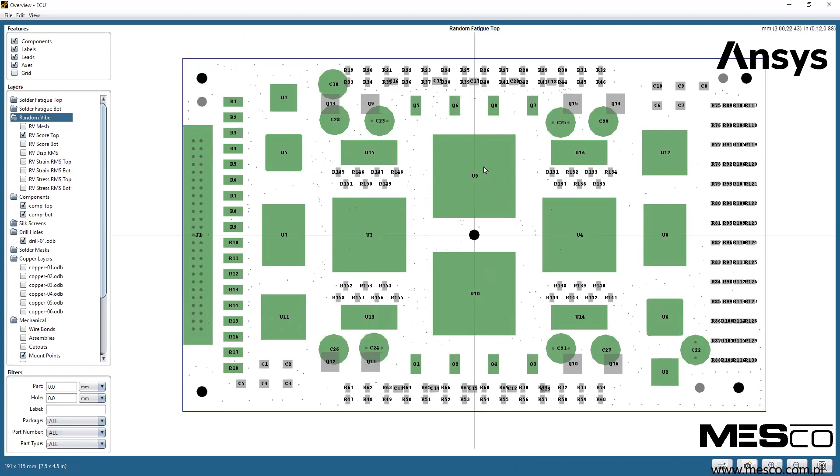So let's go back to our layer viewer here. The random vibe analysis updated, and now we can see that the displacement changed by using this additional mount point here in the center. If I go for the strains at the top, we can see that we get quite high strains around the mount point. But it seems we fixed our problems with U9 and U10. So using an additional mount point, if possible, would be a very good solution for increasing the lifetime for our random vibe analysis here.

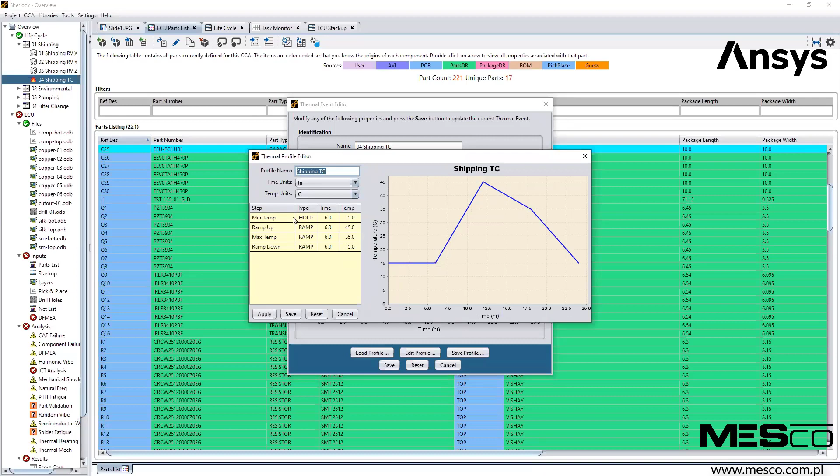Okay, I see, Sebastian, the last question on Q&A. Is it possible to load a test temperature profile from an external file? It is possible. It's possible to load a profile here as a CSV file, but it's not like a time-dependent file we can read in. It's just like these steps here. So we can export a defined profile here and load it in later on. When we have some temperature measurements or some thermal simulation, we need to think of the different ramps first, how we simplify this temperature profile.

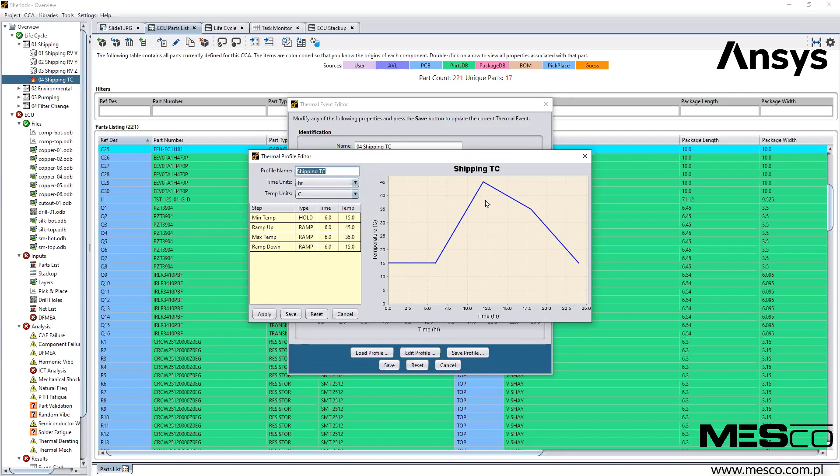But what we can do is we can use these temperatures for different components. So maybe the components on the outer edges of the board are not getting as hot as the components in the center. Then we can define different thermal profiles for each of the components. So it's not just like I showed you today, like this typical oven test where all the components have the same temperature. Then we can import temperatures for each component and get different lifetime predictions, of course, for these components.